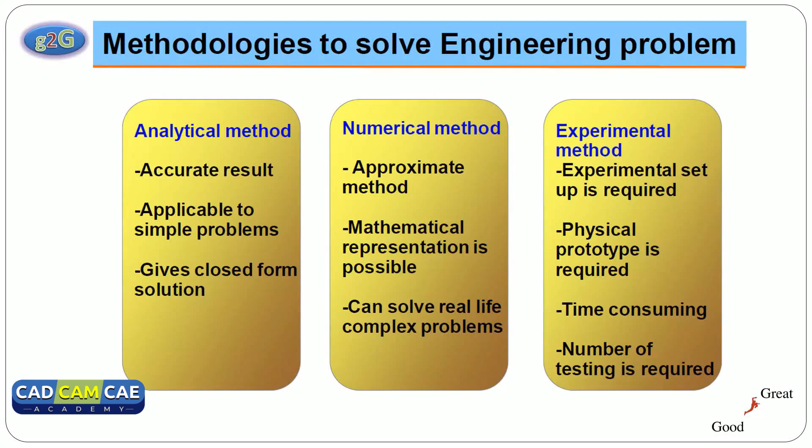Then the numerical method. The numerical method is an approximate method. The mathematical representation is possible in the numerical method and we can solve real life complex engineering problems. So finite element analysis is a numerical method, and with the help of software using finite element analysis, we can solve complex real life engineering problems and validate the results of the numerical method with the analytical or experimental method.

Finite element analysis is used to solve problems involving stress analysis, fluid flow problems, heat transfer, vibrations, electromagnetism, etc. Finite element analysis is a numerical method for solving field problems in engineering and mathematical physics. It is used for problems with complicated geometries, loadings, and material properties where an analytical solution cannot be obtained.

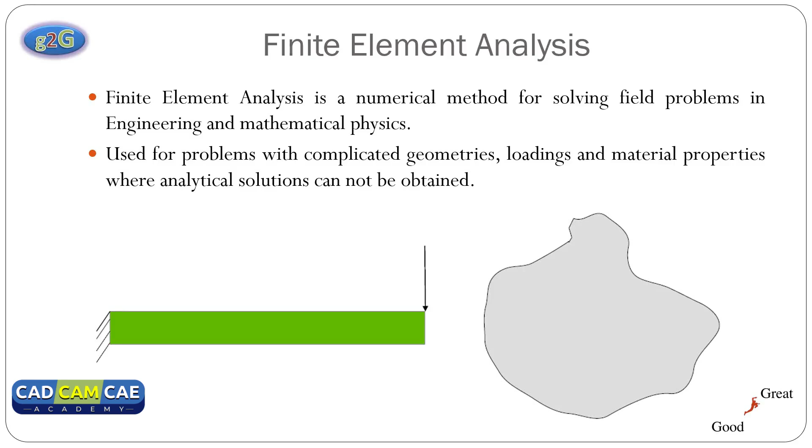The introduction to finite element analysis. The finite element method is a numerical technique to solve field problems in engineering and science. The technique has very wide application and has been used on problems involving stress analysis, fluid mechanics, heat transfer, diffusion, vibrations, electrical and magnetic fields, etc.

The fundamental concept involves dividing the body under study into a finite number of pieces called elements. The division of the body into a number of parts is called discretization or meshing in finite element analysis. Discretization is the main part of finite element analysis, and without dividing the body into a number of elements, we cannot proceed with the analysis of any mechanical component.

Particular assumptions are then made on the variation of the unknown dependent variables across each element using so-called interpolation or approximation functions. This approximated variation is quantified in terms of solution values at specific locations called nodes. The figure given below is a component which is divided into a number of parts called elements. The corner points of each element are called nodes.

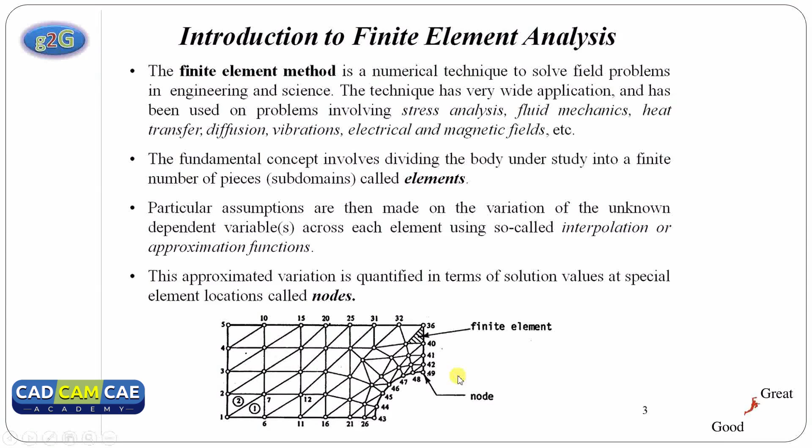So in any body, using finite element analysis, by applying the boundary condition, that is nothing but applying the force, we can obtain the displacement of each and every node and the stresses on each and every element.

The phases of FEM. There are basically three phases of FEM, that is pre-processing, solution and post-processing. These three phases are involved in any finite element analysis software. So what is pre-processing? The preprocessor is a phase that processes input data to produce output.

Which is used as input in the subsequent phase. So the first, pre-processing, involves the material properties, then applying boundary conditions, then dividing the body into a number of parts and generating the elements and nodes. So that portion is involved in the pre-processing.

The second is the solution or processing. The solution phase generates element matrices, computes nodal values and derivatives, and stores the result data in files. These files are further used in the subsequent phase, that is the post-processor, to review and analyze the results through graphics display and tabular listing. So in the solution phase, any software uses the differential equations at the backend to solve the unknown variables.

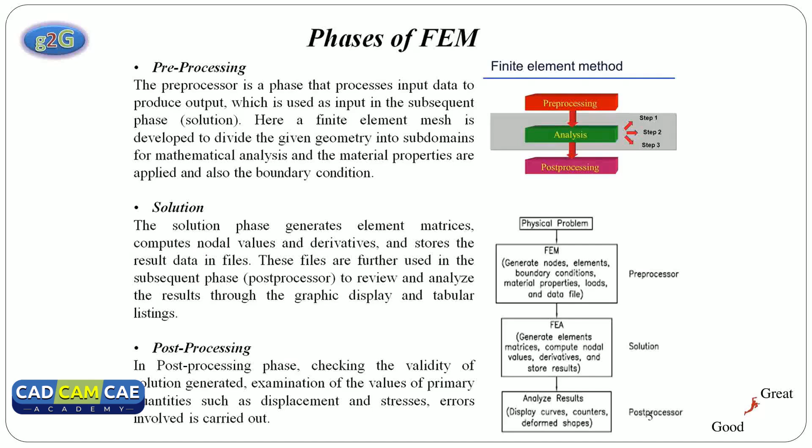The next is the post-processing. In the post-processing phase, there will be an interpretation of results in the form of contour plots. So in the post-processing, we will be finding out the output parameters like displacement, stresses, strains, and compare them with any other method.

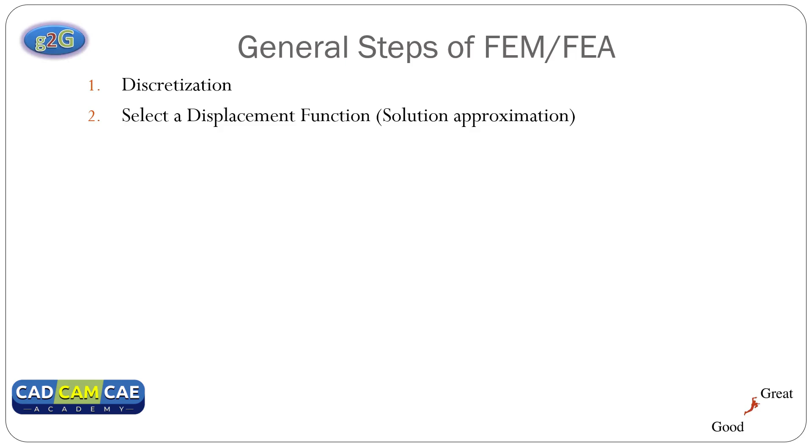General steps of finite element analysis. Step number 1 is discretization, that is nothing but dividing the body into a number of parts. Step number 2 is to select a displacement function or select a solution approximation. It means in step number 2 we use the differential equation to solve the unknown variables. Step number 3 is to derive the element stiffness matrix and equation. So for each and every element, by using the finite element analysis, we need to prepare an element stiffness matrix.

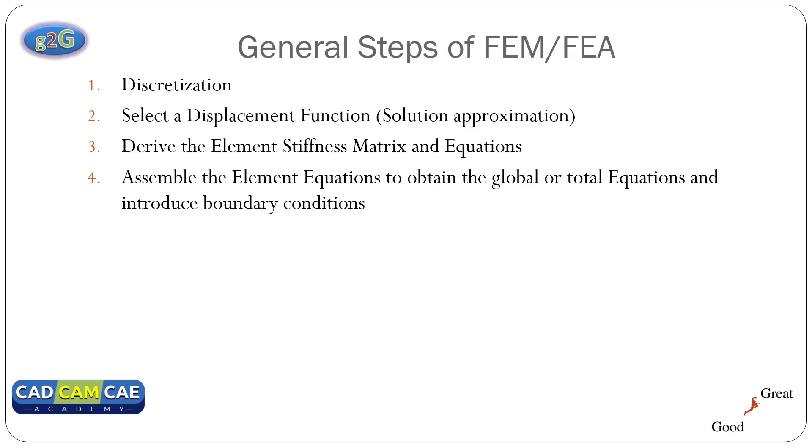Step number 4 is the assembly of all the element matrices, that is nothing but the global or total element matrix. Step number 5 is to solve for the unknown degrees of freedom, that is the primary unknowns. Step number 6 is to solve for the element stresses and strains. And last, step number 7 is the interpretation of results in the form of contour plots, that is called post-processing. So these are the major 7 steps of finite element analysis which are used in any finite element analysis software.

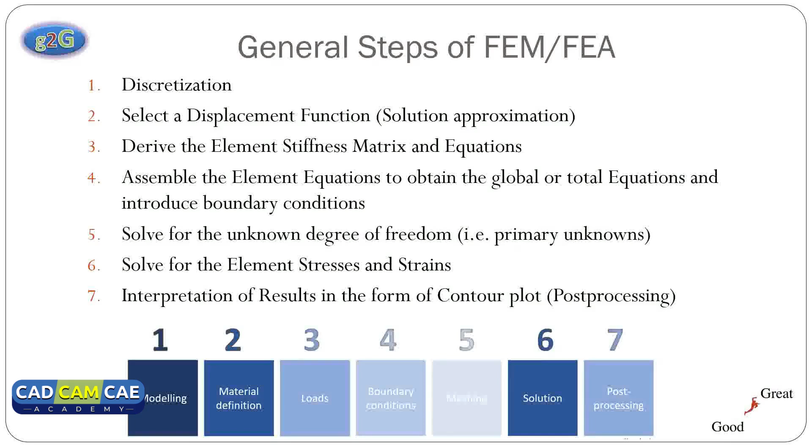So these are some basic steps of finite element analysis represented at the bottom of the slide, and these steps are followed by the ANSYS Workbench. First of all, modeling, then 2 is material definition, 3 is the load, 4th is the boundary condition, 5 is the meshing, 6 is solution, and 7 is post-processing.

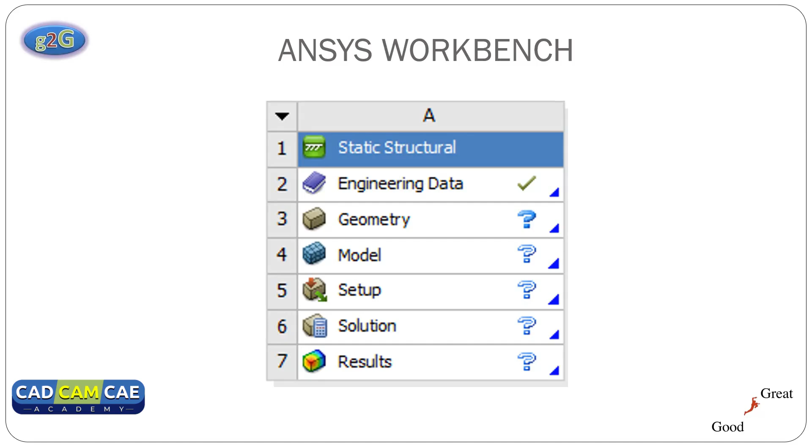The solution, this is the solution phase, that is the processing phase. In the solution phase, ANSYS will solve all the input parameters, that is the pre-processing parameters. At last, step number 7 is the results, where we can find out the results in the form of contour plots for the displacement, stresses, strain, etc. So these are the steps of finite element analysis using the ANSYS Workbench.